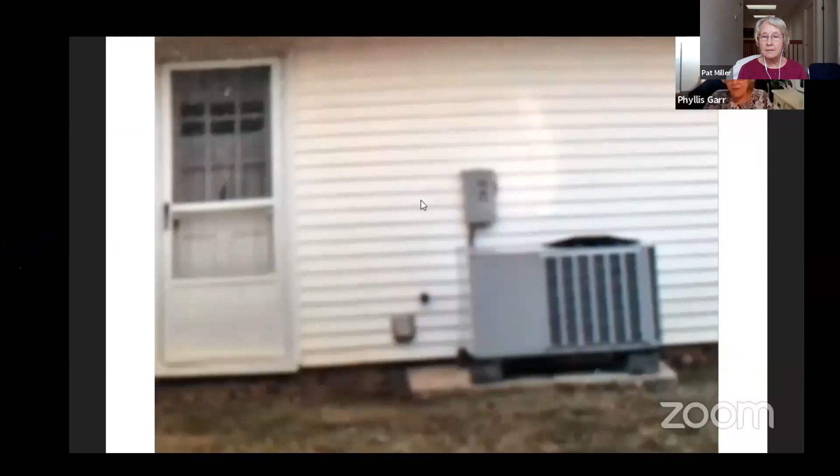This was our first heat pump. It's outside, on the slab of the air conditioner, which had been extended a little, and this is where the air comes in. Next, I'd like to show you the inside part - this is the inside part of your unit, and this is what blows the hot air, or in summer the cool air, throughout the house.

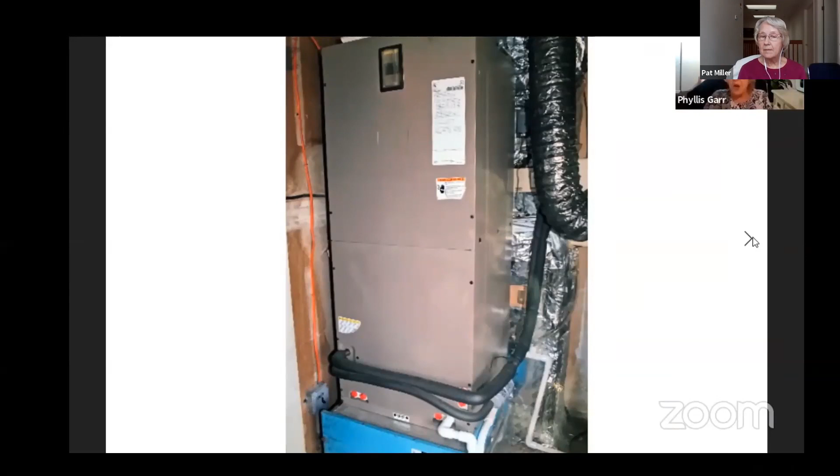Now, we had something in the oil burner that took care of hot water, so we needed a new hot water something - some kind of heater. And we bought a high efficiency water heater. At that time, they didn't have any connected to heat pumps, but this has really been pretty amazing. It keeps the heat in, the cold out.

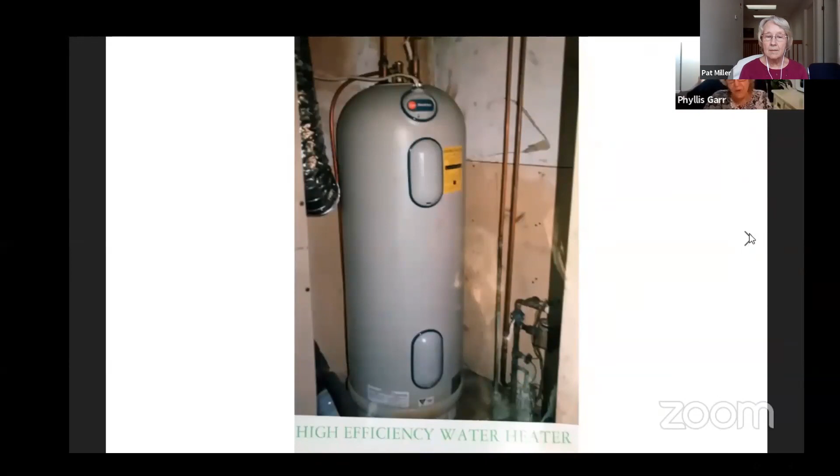We have never, in the 14 years I've had it, had any problems with it. It wasn't really planned that we were going to get solar at this time, but we had been waiting 1.5 years for a subsidy to come through from New Jersey, and it just happened to come through when we were putting in the heat pump.

Next, we're going to show you the inverters, because the inverters - the three that say Aurora - take the energy from the sun and make it so you can use it in your house. Today I have 5 of them in my house because I have the 2 systems. There were many things that I noticed when I got both the heat pump and the solar panels.

The first thing I noticed was I only had to dust the house every other week instead of every week. It was so clean. Everything was quiet, both the heat pump and the solar - you didn't hear them. I had no regular maintenance with either one. And if you wanted to turn the heat up with the heat pump, it heated very quickly, and with air conditioning, it cooled very quickly.

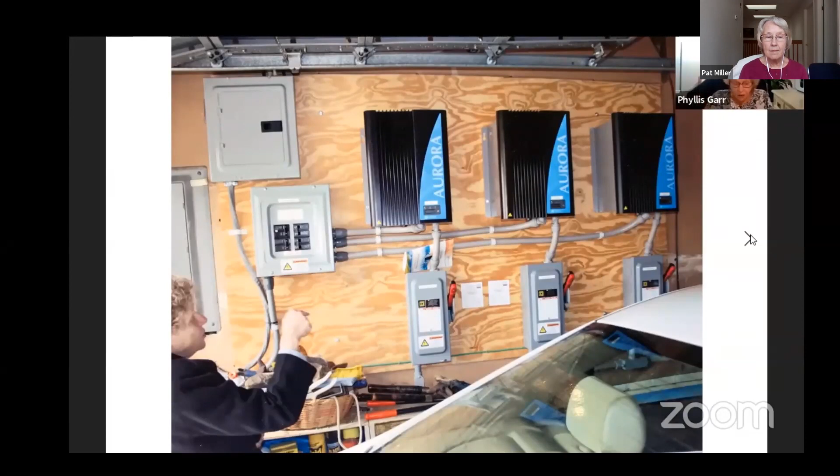My daughter also happened to get a heat pump a few years after we did, and she got it in the middle of the summer. She called me up about a month after she got it and said, 'Mom, I can't believe it, my electric bill went down $100.' And that's it - all of these together are very economical.

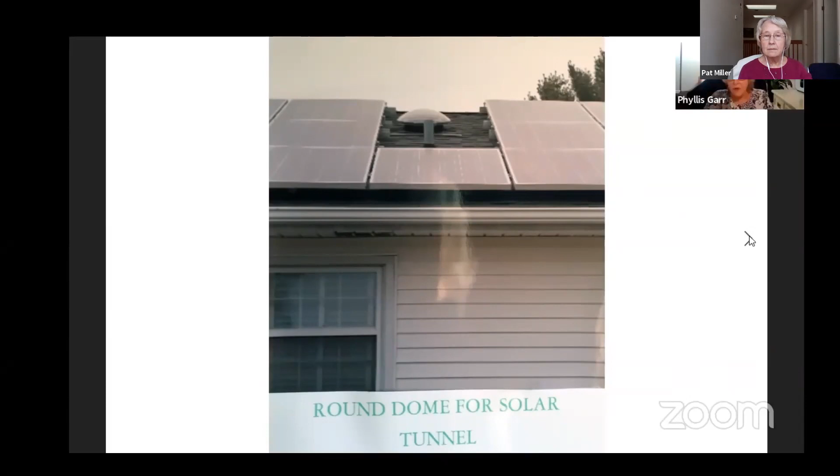All the light comes in there and goes through a tube, and that tube is like a very shiny, bright metal. It reflects the light all the way down to this - it looks like a fixture in your room. This is in our entrance hallway, and we have the exact same thing in our bathroom. It is very bright, and except at night, when it snows or rains, you don't need a light in these areas.

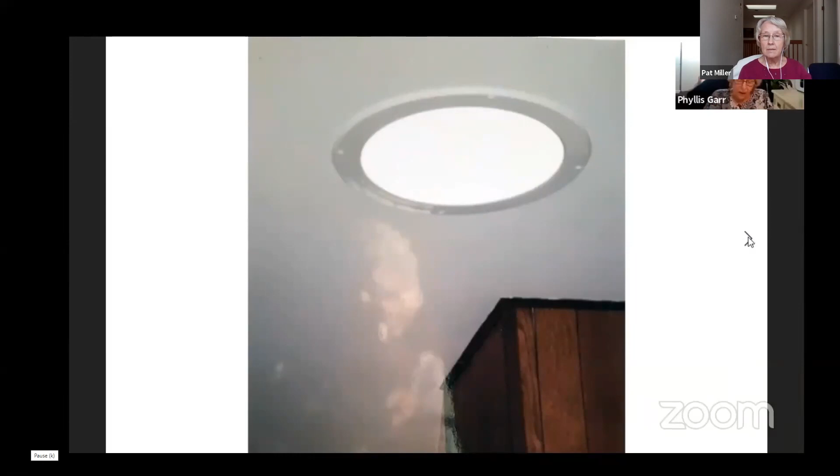And the only time I don't use that is when we go on a long trip. But one thing I know a lot of people are worried about with EVs is how are you going to, when you're on a trip, find a place to charge your car?

Well, my car is a computer. If you want to find a place, you just put your finger on a dot on the left-hand side of your screen, which is a computer screen rather than a dashboard. It comes up and tells you all the different electric charging stations and where they are. They're always near food, so you can go in and buy a meal while the car is charging. And they're all superchargers, so you can get a half a charge in about 20 minutes.

All of my appliances are Energy Star appliances, and they're all electric - my water heater, my car - and this past year, for all of the electricity used, it cost me for the whole year, from the end of October to the end of this October, $922.08. My solar arrays, including both the first system and the second system together, cost me $54,000.

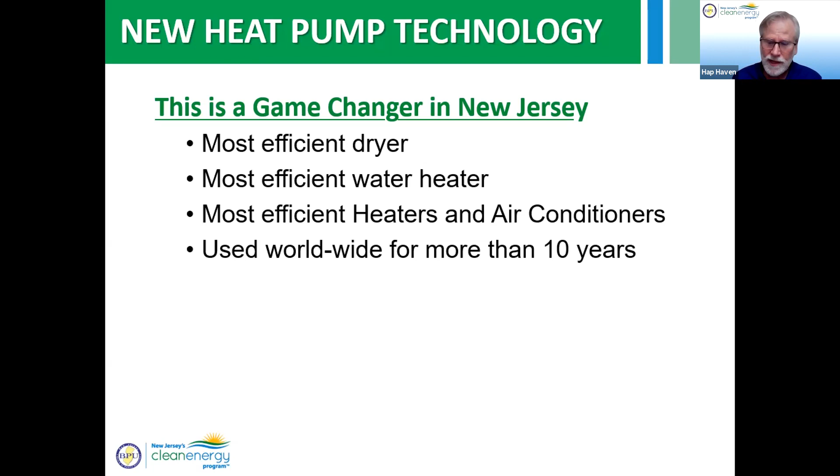I'm not talking about heat pumps the way my first heat pump was, 30 years ago in this house that I live in, and probably Phyllis's as well, which were not efficient for New Jersey when it got cold. The new ones, cold climate heat pumps we're going to talk about today, are tremendous in terms of keeping their efficiencies well below zero. Our design temperatures in New Jersey are 15, 16, 17, 18 degrees, so these heat pumps can outperform everything on the market. Heat pumps are by far the best technology to move us forward.

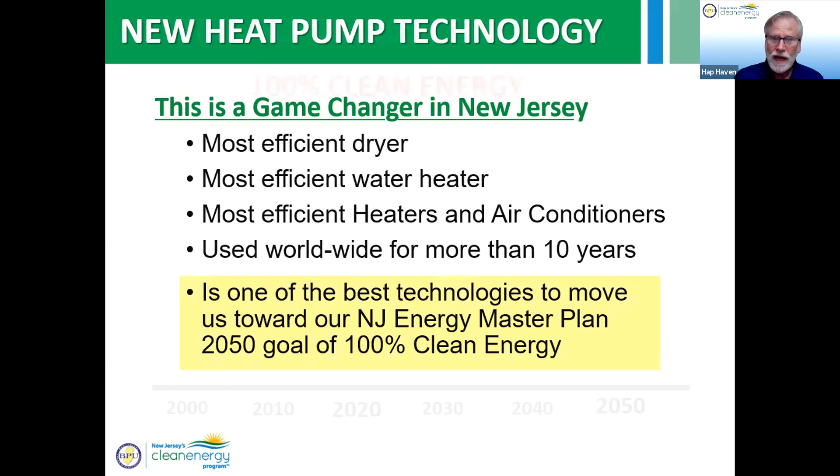And Pat, you already mentioned this: the New Jersey Energy Master Plan, signed in 2019, created a 2050 goal of 100% clean energy. We have to recognize there are certain pathways to achieve that, and heat pumps are one of the best ones. People say to me all the time, well, we'll never get there, that's impossible. But 2050, that's right around the corner.

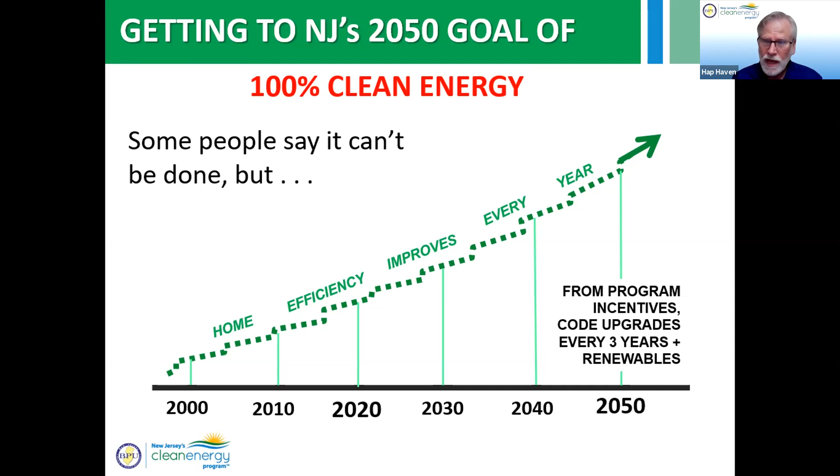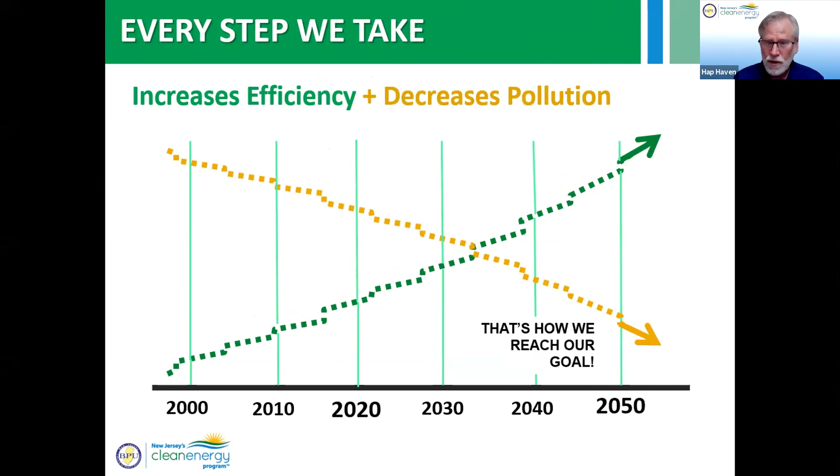What I would point out is that every 3 years we have a new energy code in place, and every 3 years the residential energy code ratchets up the efficiency we have to meet with building new homes and doing retrofits. So every year, with program incentives, code upgrades, and renewables, we're improving our efficiency. And the great thing is that as we improve our efficiency, the pollution goes down—not just CO2, which is what we worry about for the global climate crisis, but all pollution goes down. This is a surefire way of getting to our 2050 goal.

I mentioned I was at a conference last week. This was one of the slides that came straight from the Department of Energy. Basically, they said to get to their 2035 goals, we need to look at 4 pillars, listed on the right: energy efficiency, demand flexibility—that's changing loads on the grid, as well as installing renewables—beneficial electrification, which is what I'm going to be talking about today with the heat pumps, and embodied carbon, which means taking carbon out of the air. They've been talking about this technology the entire 40 years I've been in the industry, but it's finally beginning to move forward a little bit, and that's really great.

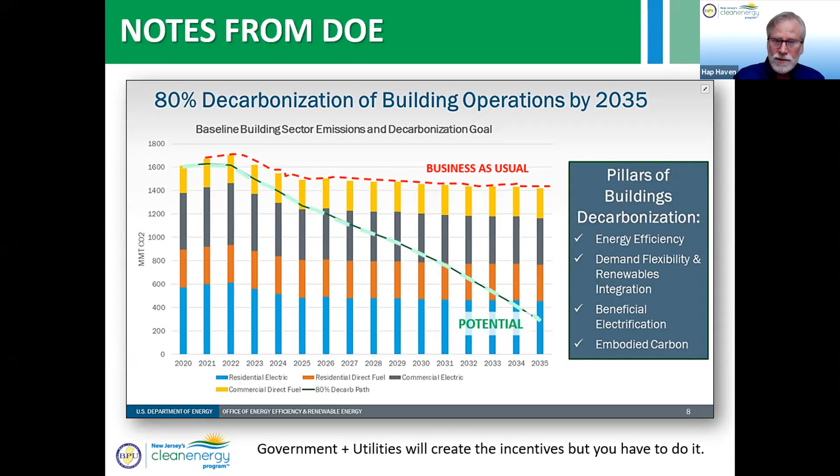So instead of business as usual, we can pull all those numbers down and get to our potential, but it only happens with action from you and from me. Governments and utilities can create incentives, which we've had for the last 13 years in New Jersey, as well as with the federal government, but you have to choose to do it—like Phyllis, to install the heat pump, install the solar system, buy the Tesla. There are going to be so many electric cars on the market now in the next few years, it's crazy. So we have to actually do it.

When you participate in the program, you're helping us all move forward to an energy efficient, clean, and sustainable future. We have rebates for the smallest house all the way up to the biggest commercial and industrial building in the state, so you have to take advantage of them.

If you do participate in our program in the state, we process about 12,000 applications every month. You have to understand that New Jersey, little old New Jersey, is a big player in the country. When we process those 12,000 applications, we give out rebate money back to people—about $12 million a month. And that has a cumulative effect of taking the equivalent of 8,000 cars off the highway every month. So the rebates, the incentives, they can work, and we're making a difference here in New Jersey all the time.

So here's the 10-second overview of the residential side of the program. We have rebates for appliances, for major appliances like your heating and air conditioning, for Energy Star homes, or home performance with Energy Star, which looks at the house first, then the mechanicals. And then, of course, if you're buying a new home, we can build homes that are zero energy—this has been going on for quite a while, folks. We can build zero energy homes right now, right today.

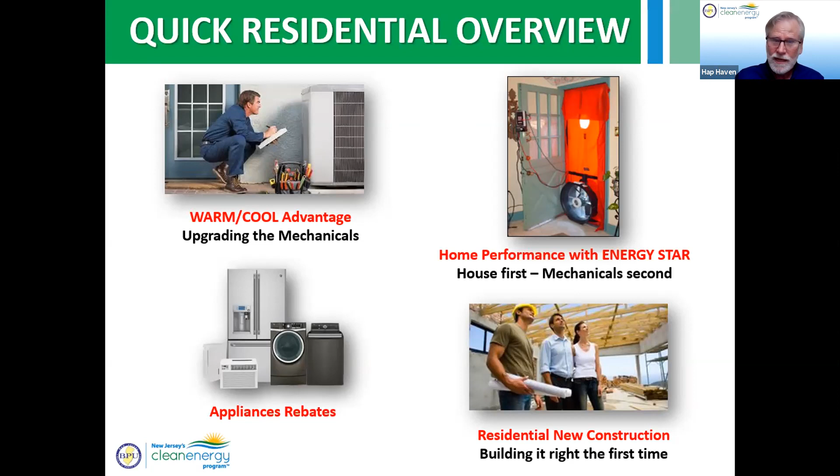And over in Europe, they have a great program for basically their version of home performance with Energy Star, where they measure homes with lasers, and they create an entire new facade for the house and a new roof for the house in factories, and they come in and bolt it on. They do a gut rehab basically from the outside in, and get the house to zero energy, even though it's an older house.

Now here's the thing I have to tell you about today. The program, which has been up and running for 13 years now, is changing. As of July 1, a good chunk of the program is going to be shifted over to the utilities. The utilities will be getting the existing building programs and the product side, which is all the rebates for both major and minor appliances. But the interesting thing, especially important for contractors who usually float the money between the homeowner and the rebate, is that process will go faster.

We expect that most utilities will have dedicated multifamily programs and more financing options. So it's transitioning, and the utilities will be taking some of it, but the state will keep some of the programs. They'll keep the new construction, large energy users, and all these other things. If you want to get the latest and greatest on the transition, log onto the website, njcleanenergy.com. That's how you keep up. I can give you this amount of information right now, and every week we get just a little bit more like that, so pay attention to the website.

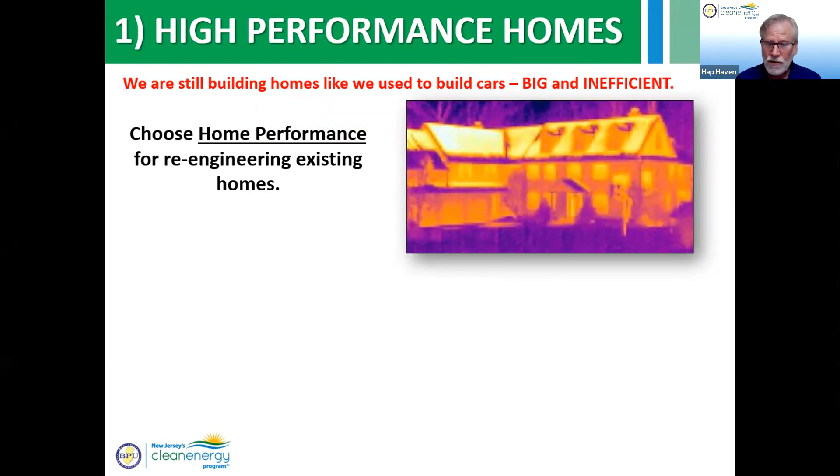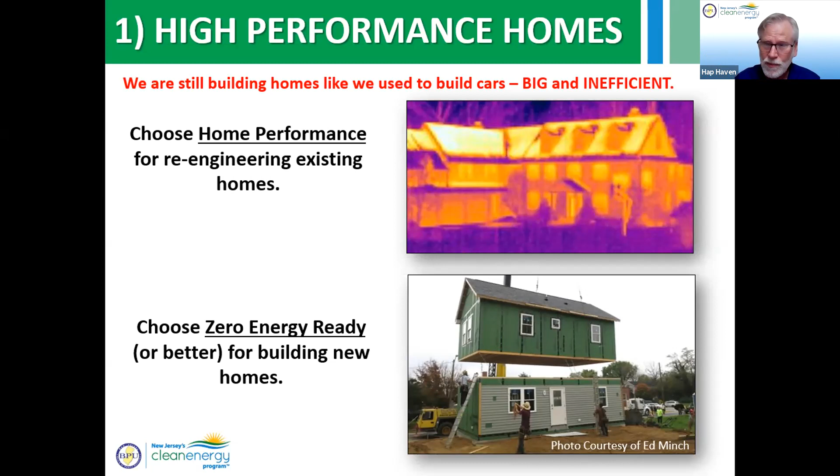And this is an affordable house. I mean, it's not like that $1 million house you see above it with all the dormers and additions and 2-car garages. It's a simple house, but we can do that, and we can create zero energy homes.

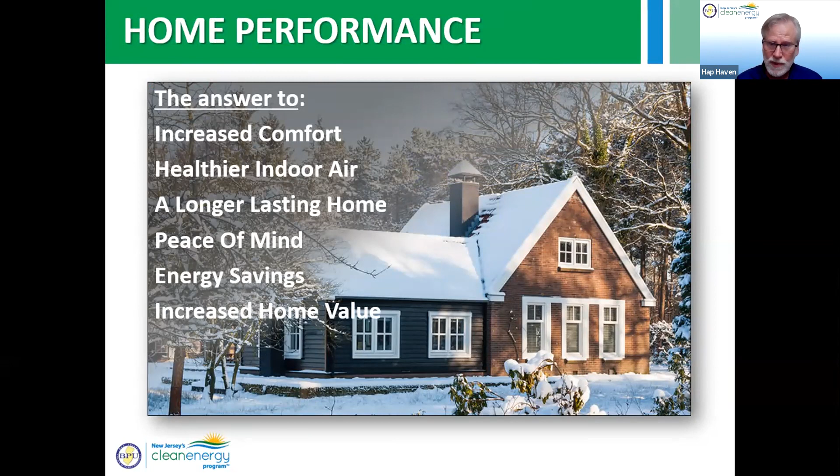Home performance is the starting point for the heat pump technology, because it's worthless to be taking a high performance piece of equipment and putting it into a house that doesn't work. Home performance increases your comfort, increases your indoor air quality, it creates a more durable home, gives you some peace of mind, as well as creating energy savings.

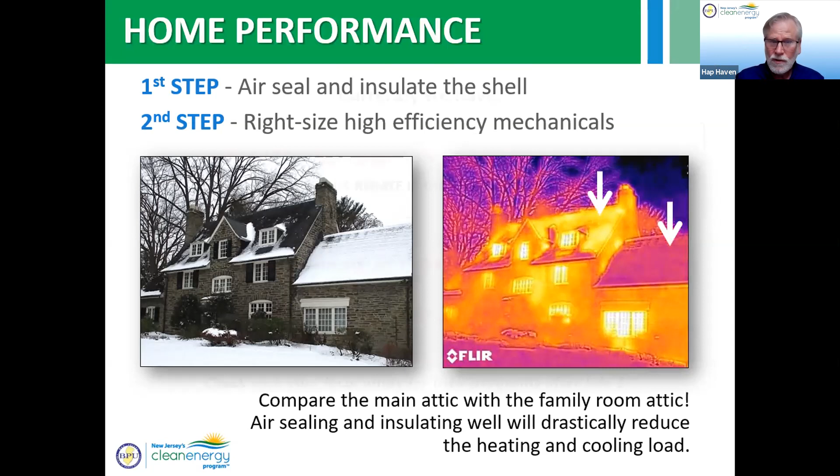Here in New Jersey, these are the rebates available for home performance: up to $4,000, 50% of the cost; up to $10,000, 0% financing for 7 years; or up to $15,000 for 0.99% financing. But if you lock your program or house into the process before July 1, you're good to go. After that, you'll have to talk to the utilities.

Number 2 is appliances. You need to be buying the most energy efficient appliances that you possibly can. You can find them online at EnergyStar.gov's product finder. This is a key thing.

I'll give you an example. When I was buying a new dishwasher about 7 years ago, being an early adopter, I wanted the best one possible. At the time it was made by Asko, a Swedish company, 92% efficient, but it cost $1,600. I couldn't afford that, so I went to Energy Star and went down the list until I found the next one: made by Bosch, 86% efficient, only $800. So what I always tell people is buy the most energy efficient product you can afford. That's the key thing.

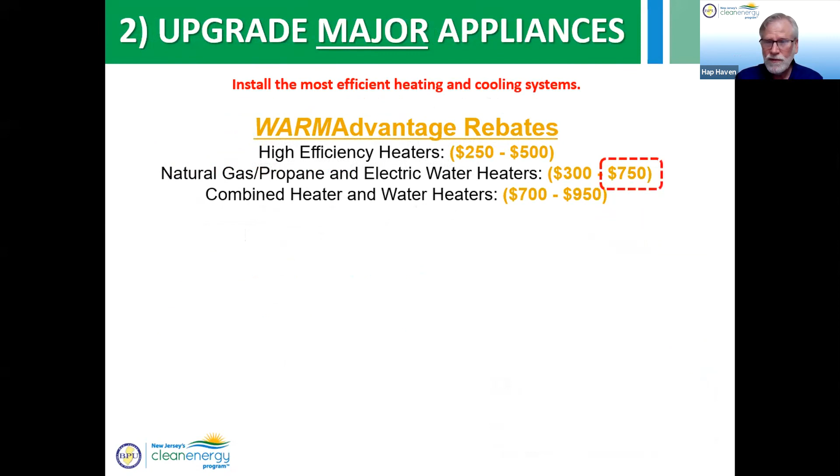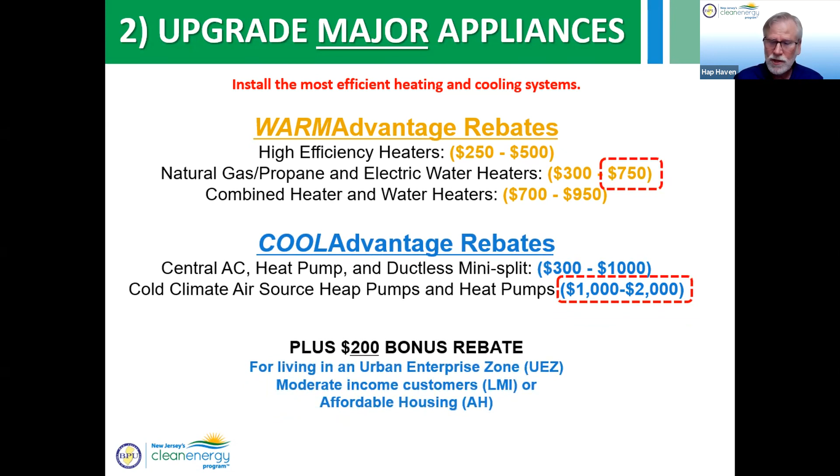Now there's major appliances: heating, cooling, air conditioning. You can see the rebates on the heating side range from $250 up to $950—that $750 one is for a heat pump water heater. On the Cool Advantage side it goes from $300 to $2,000; that $1,000 to $2,000 range is for cold climate heat pumps, which we'll talk about now. And of course there are additional bonus rebates if you qualify, depending on the situation. You can talk to contractors about that, or read up on it on the website.

Let's talk about the heat pump water heater. Remember, a heat pump itself is like your refrigerator—it takes heat from one place and puts it in another. Except a heat pump for heating purposes takes heat out of the house in summer and puts it back in winter; it's just moving heat from one place to another. The heat pump water heater takes heat from your basement air and puts it into the tank, and the exhaust air that comes out is cooler and drier.

So in the summertime it makes a lot of sense to let that heat pump blow air into the basement, because you get dehumidified air there. In the wintertime it may not make as much sense, so that 8-inch round exhaust can be ducted to the outside, and you just put in a damper for summer and winter—pretty simple, straightforward. We're going to give you a $750 rebate for trying this out. This is still new, still cutting edge in New Jersey.

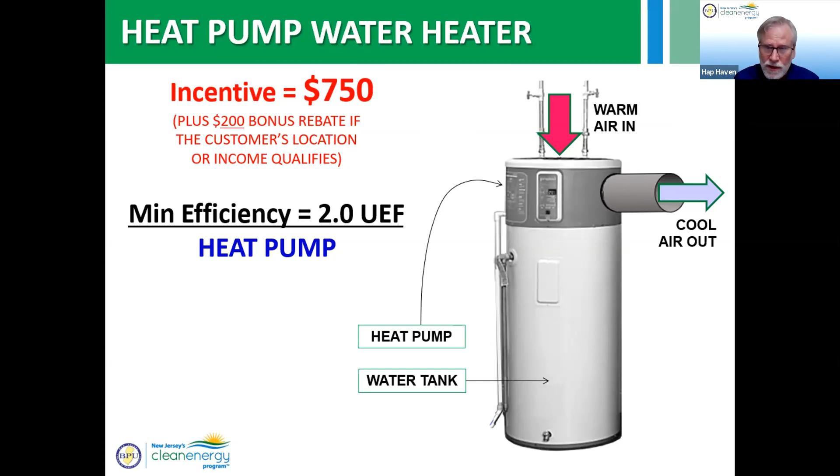There are more of these cold climate heat pumps installed in Vermont than here in New Jersey, because the heating contractors and plumbers haven't gotten with the program yet. I give presentations every week to contractors, and they're looking at this stuff—they don't have the experience yet, but they're getting it slowly, and with the rebates from the state, it's making a difference.

When it comes to a heat pump, people make this assumption all the time that we're talking about ductless in most cases, okay, but not the regular mini splits, not a regular heat pump. A ductless mini split is nothing more than an outdoor unit, that's the compressor, and an indoor head, with a line set between the two. I can take the heat from one place, dump it outside for the summer, and take it from the outside and dump it inside.

But the cold climate heat pump is functional well below zero. I'm putting these metrics here just so you can see them. This is what the contractor needs to do in terms of the actual metrics, and we don't have time to go into what they all mean.

But let's point out the red one, the COP, coefficient of performance. Your eyes don't have to glaze over. This is really simple. 1.75 means 175% efficiency, with 100% being if it was electric strip heat. I'm getting 1 unit of energy in terms of electricity, and 1 unit of heat out.

With typical heat pumps, old-fashioned heat pumps, that number decreases. Once you hit like 40 degrees, that number starts decreasing. This particular one, and in our program, we require, to get the rebate, to have 175% efficiency at 5 degrees. You guys never see 5 degrees here in New Jersey, maybe if you're in Sussex or way up at the top end of the state.

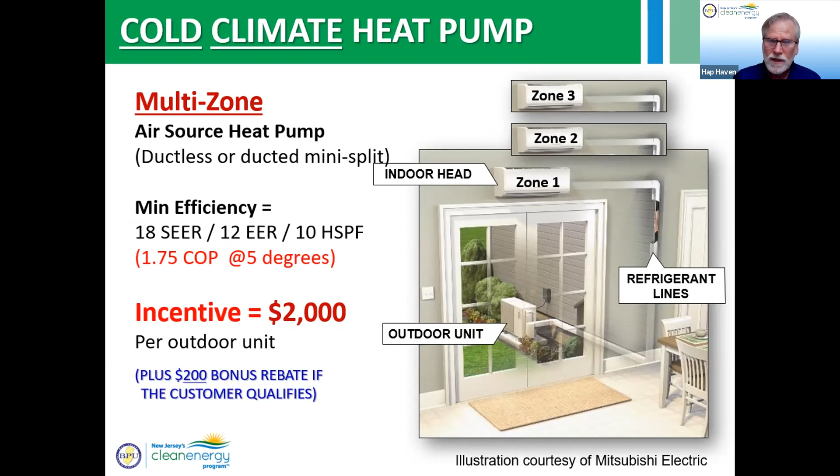So now on to number 3. Remember, we had 4 different things we wanted to look at to get to our 2050 goal. Obviously, adding on some sort of alternative energy is key. We have over 100,000 PV installs in this state already, and it's just going to keep going, more and more installs like that.

But it doesn't necessarily mean PV, it could be solar thermal. This is an evacuated tube system for heating hot water, and this is my house on the bottom there. When I installed that, about 20 years ago, we didn't have heat pump water heaters. If I was to do this all over again, I'd buy and install the heat pump water heater because it'd be less money than this, and if anything ever went wrong with it, it's right there in front of you.

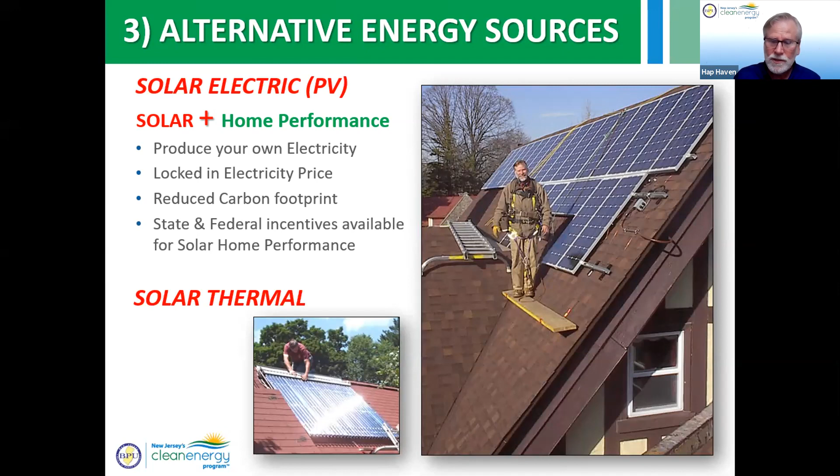You can manage this. All you have to do is have a large enough overhang on the outside, those patio doors, outside those French doors. I have an 18-inch overhang, which allows this in the summertime, when the sun is high in the sky, to shade the hallway. I don't get the solar gain.

And all of you on the line, if you ever went to the Jersey Shore when you were a kid, you remember this. Air conditioning was never at the Jersey Shore. It was always front porches and awnings. Everyone knew how to turn their back on the summer sun to stay cool and allow the breezes to come and go. You can still do that, right? But we've sort of ignored this portion of the equation.

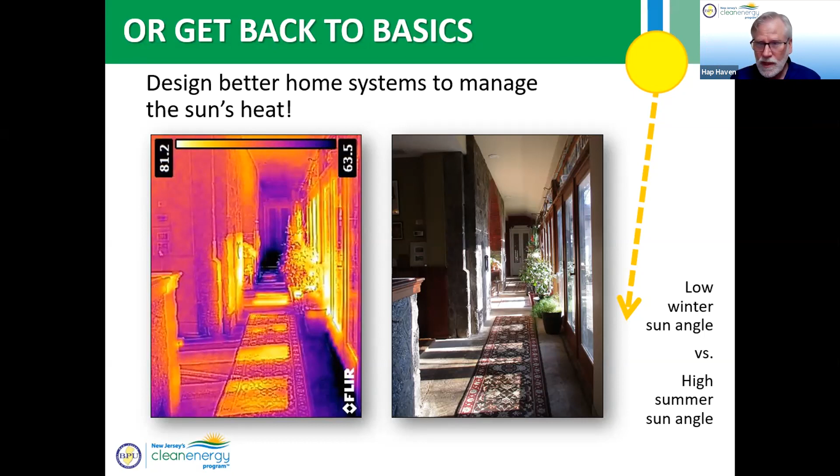Here's just one little extra tidbit I want to throw out, because the technologies are coming on strong.

It's really an exciting time to be alive because finally things are happening.

Hydrogen fuel cells can be either blue, green, or gray. Gray is when we create electricity from natural gas by burning it. But you can take natural gas and split it apart to get the hydrogen to run a fuel cell to get electricity, and that's what they're doing for big trucks right now in Los Angeles. They have hydrogen fueling stations, and it's really exciting.

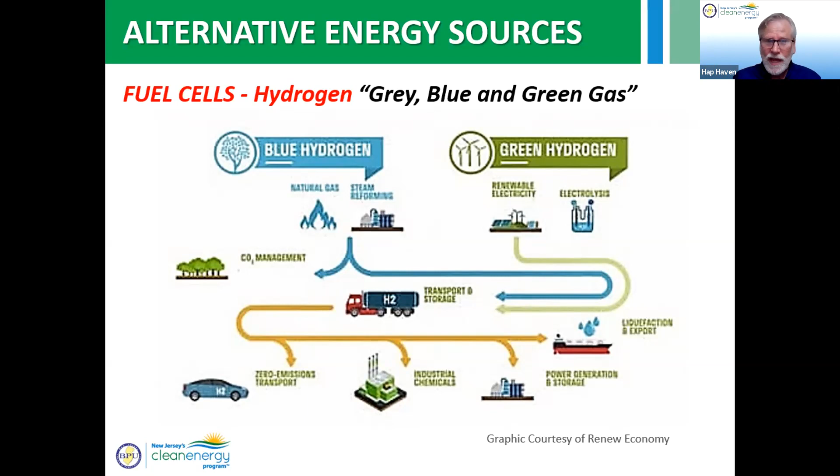The technology is moving. And then the real green hydrogen doesn't come from natural gas at all. It just comes from splitting water into its component parts, and we get hydrogen as part of that, which we can use to generate electricity. But that's not what we came here for today—I'm just showing you something that's on the horizon.

So, testing everything. And as an aside, let me say, we're all working toward an electric economy, which includes heat pumps in a big way. But there is a cautionary note, because with the current state of the technology, we are using gases that get compressed here and expanded there, or expanded here and compressed there, to move the heat back and forth. And they have a huge global warming potential, so we can't have leaks in these systems.

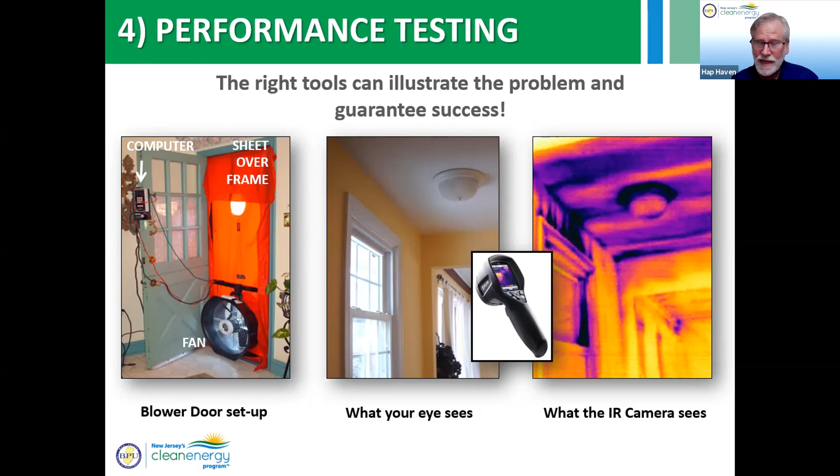In order to guarantee that, your mechanic has to test. They have to guarantee that you have no leaks in the system. So I think I'm almost right on my mark there, Pat.

I just want to emphasize that in order to get to this 2050 goal that we're all looking forward to, with electrification, we first deal with the shell—whether it's retrofitting with Home Performance with Energy Star, or a brand new Energy Star Zero Energy Ready Home, or Net Positive Home. The next thing is upgrading our regular appliances as best we can, upgrading the major appliances as best we can, and then adding on some sort of alternative generation to the house, as we can.

So New Jersey's Clean Energy Program, both now and as it evolves back to the utilities in some cases, needs you, needs you and me and everybody to participate and take advantage of the rebates. So thank you so much, Pat, for letting me come and talk to your folks today.

Well, thank you. And if you would turn off your share, then I have a few questions in the chat to ask you. So let's push the little arrow here. It should be one at the top, I think. Stop sharing—yeah, it was hidden there for a second. Oh okay, yeah, I have that problem. I would have turned it off myself, except I couldn't figure out how to.